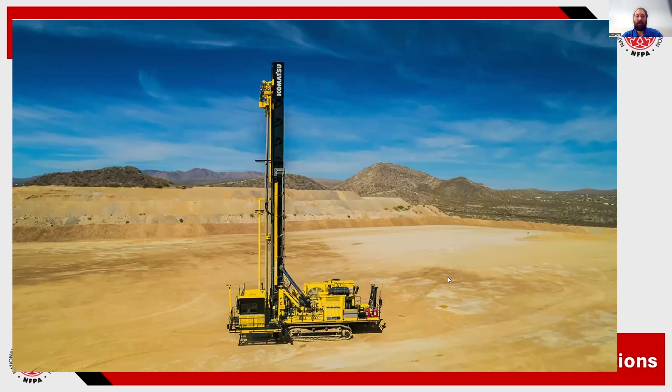In addition to the Ultra Class 320 XPC electric drill, we also offer several diesel-powered drill models. So pictured here is our ZR122, which is named for the 122,000 pounds of available drilling force. The tall structure you see sticking up into the air is called the mast on the drill. And on the mast is a hydraulically driven carriage on a rack and pinion drive for the vertical movement of drilling. The carriage also contains two hydraulic motors on a large gearbox transmission for rotation of the drill string. So together, this rotation and vertical movement are the motions used for drilling holes.

There are additional auxiliary components mounted on the mast that are used for adding and removing drill pipe and drill bits as these consumable components wear out over time. Every motion on our ZR machines is hydraulically powered, whereas on our 320 XPC drill, we have both electric drive and hydraulic controlled functions. Our discussion today will be primarily focused on our ZR line, although there is some overlap with our electric machine.

Today we'll be touching on many of the functions used when operating blast hole drills, but at the end of the day, their purpose is to drill out a series of holes in the ground called a pattern so that the blast crew can load the holes with explosives, set off the charge, fracture the rock, and ultimately load and process the material. These holes range in depth from about 50 feet all the way up to 280 feet deep.

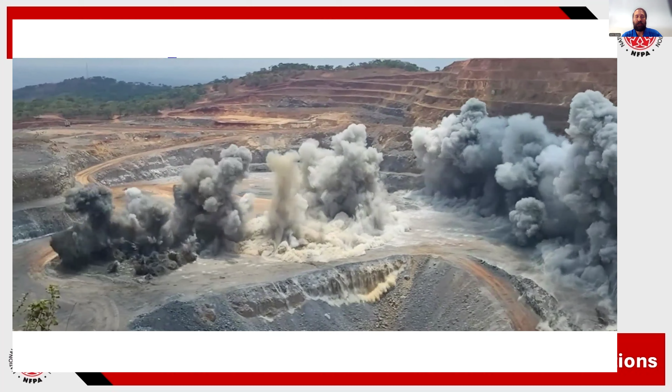So as drill engineers, we can't help but include a short blasting video to illustrate this part of the mining process. So you can see the blast going off in the video right now. Hopefully this will give you a good understanding of what a blast hole drill is and the type of environment it operates in.

So now I'm going to give a brief overview of some of the major components of the machine hydraulic system before Cameron goes into a little more depth on how we utilize the sensing technology to control various functions on the drill. I'm going to focus on our open loop or auxiliary circuit for today. This system on the drill controls all the functions that are not either drilling holes or propelling or tramming the machine from hole to hole.

So at the heart of our open loop circuit, we have a 210 cc variable displacement axial piston pump. From this pump, flow is directed out to multiple valve manifolds that control actuators, which are mostly hydraulic cylinders, and these actuators perform various functions on the drill. The major valve manifolds we have on the drill include mast control, drill bit and drill pipe handling control, and leveling jack control manifolds. On each of these manifolds, we include a load sense pressure transducer to read the load pressure at the valve work ports when that valve is active.

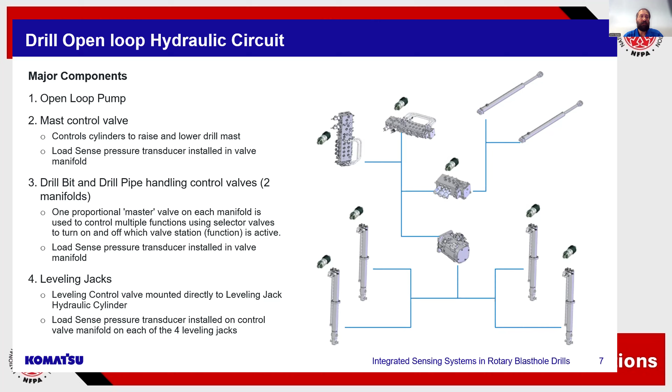So we have two manifolds on the drill that are used to control functions like bit changing, pipe changing and storage, and breaking pipe joints. These are our drill bit and drill pipe handling control valve manifolds. Each of these manifolds has a master proportional valve and then multiple selector valves. Each selector valve turns on and off functions that require proportional control but do not need to run concurrently.

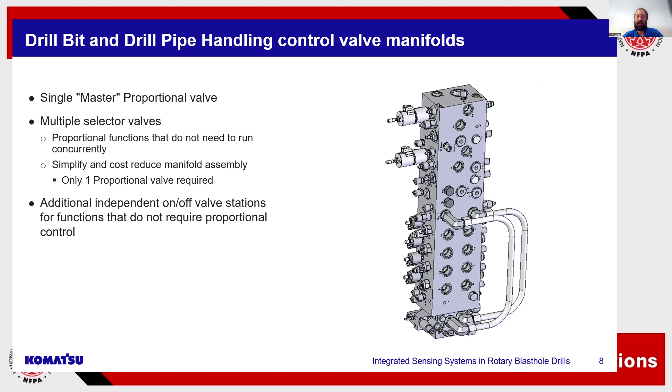This manifold design was chosen to simplify and cost reduce the manifold assembly, as only a single proportional valve is required, but we still maintain proportional control for several different functions. This manifold also includes a few additional independent on-off valve stations for functions that don't require proportional control.

The mast control manifold has a proportional valve that directly controls the mast raise and lower hydraulic cylinders. Most of the time when our drill is working, the mast stays in its vertical orientation, but we do offer angle drilling options which require the mast to be tilted at an angle when drilling the hole pattern, and also when the drill is being moved off a pattern or propelling a longer distance or perhaps up a steep grade in the mine, we do lower the mast down to the horizontal orientation.

The large hydraulic cylinders used to raise and lower the mast have integral counterbalance valves to prevent a runaway condition with the large overhung load of the mast when you're moving it up or down. A load sense pressure transducer is installed in the valve manifold and provides real-time feedback to our control system that's used to optimize the hydraulic pump setting and control when we're moving the mast.

Just like the last manifolds I showed you, this manifold does also include a few independent on-off valve stations as well for functions that don't require proportional control, such as our mast pins, which lock our mast in place prior to beginning drilling.

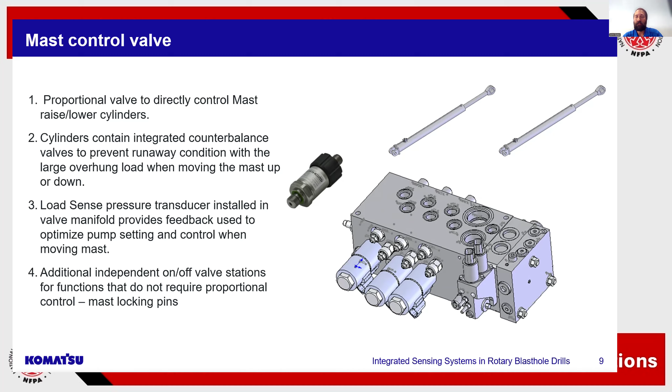On our open loop pump, we have an integral proportional relief built in that's used to set the pump pressure based on feedback from the load sense pressure transducers that we have installed on each valve manifold. So the load is sensed by those pressure transducers installed in the load sense ports of the control valves, and then the pump relief is set using that value plus a margin pressure to match pump output to system requirement.

This replaces a traditional load sense control where physical hoses would be routed from each valve manifold load sense ports and then back into the pump controller to set pump pressure. So we achieve the same result utilizing sensors, and we have the additional benefit of eliminating all those physical hoses and potential leak points around the machine.

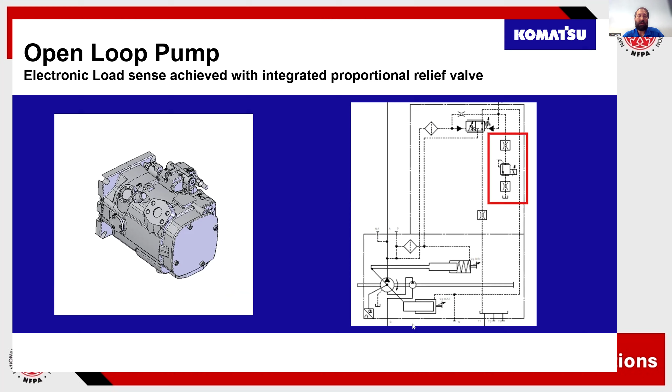The last valve I'm going to touch on today is our leveling control valve. So we have 4 of these on the drill. There's 1 for each leveling jack, which are on the 4 corners of the drill. The leveling control valve is mounted directly to each leveling jack's hydraulic cylinder, and the manifold also contains counterbalance valves for controlled lowering of the drill and also locking the jack cylinder position when the level condition is achieved and the valve is off.

A load sense pressure transducer is installed in the control valve manifold on each of these 4 leveling jacks. And similar to the mast valve, these sensors provide feedback used to optimize the pump setting and control when leveling the drill. Now, Cameron's going to go into a little more detail on that leveling process shortly and how that actually works.

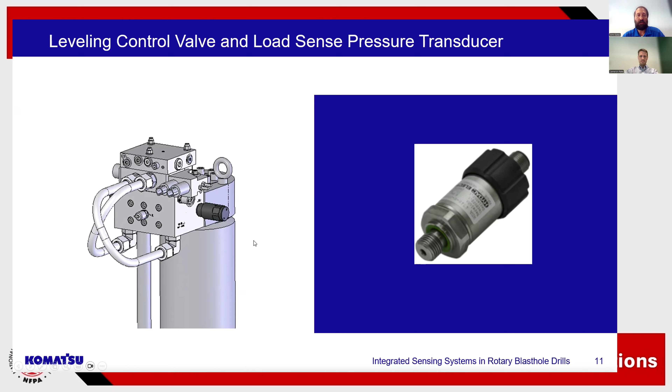So that's a brief overview of the physical hydraulic system. And now I'm going to turn things over to Cameron Raitt, our lead controls engineer for drills here at Komatsu, and he's going to get into a little bit of how we actually use those sensors to control the hydraulics.

Right, thank you, John. So I actually have a factory automation background. So those who have done controls and automation for factory machines, they know just how exciting that is. So when I started at Komatsu 13 years ago, I was actually instantly drawn to the drill products just because they're unlike any other piece of mobile equipment that's out there.

They're not just doing a repetitive motion over and over again. They're doing a series of actions through roughly 15 different subsystems with multiple variations of those actions. So actually drills were a very smooth transition for me from factory to mobile equipment.

To touch base on some of those subsystems, prior to drilling a hole, we must be level to ensure our accurate hole trajectory, which is kind of what John was touching on in the hydraulics of the leveling system just a minute ago. So automatic leveling is standard on blast hole drills now. So we asked ourselves, how could we create a system that stands out as faster, safer, more reliable?

So we started designing with the 4 independent proportional hydraulic jacks, which are the actuators of our system. And we selected a 2-axis CANopen inclinometer, which operates at a typical accuracy of plus or minus 0.1 degrees. So, typical hole, 50 feet, we can be within inches of our target location, 50 feet down. So the accuracy really plays in there. And this is, of course, assuming that we've done an accurate calibration.

This accuracy, along with the minimum sensor protection of IP67, which is a rating that we select for all our sensors on our drill, is what really drives our reliability. And there's also temperature ratings. -40 is our minimum as well for all sensors when we're selecting them.

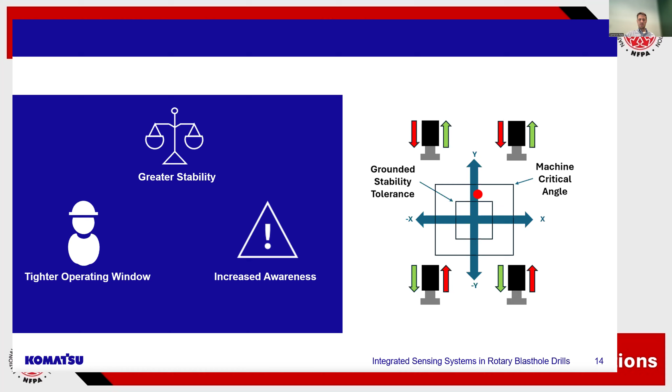I want to briefly touch on the next system, which is the mast raise lower. I know John touched on it a little bit earlier. So the mast itself is controlled with a pair of proportionally controlled hydraulic cylinders for raising and lowering, and then a pair of locking cylinders to lock the mast to the A-frame when it's raised. And then there's also a pair of locking and unlocking cylinders for angle struts. That's for optional angle drilling applications.

Our proportional valve takes in a command map based on the same CANopen inclinometer just mounted to our mast. And that allows us to do a soft landing on the mast rest in the case of lowering, or triggering our locking pins in the case of raising. So the operator selects the target angle, and then with the press of a button, the struts are unlocked and the mast moves into that target position. And then the struts are locked in at that target angle.

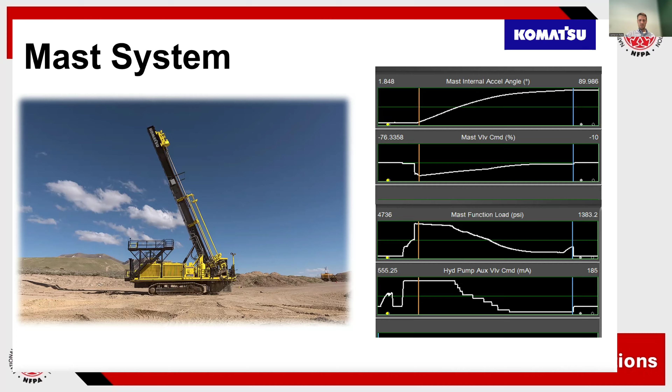Cameron, I'm sorry to interrupt. We have a question in the chat that I think this would be the right time to ask. Do you face issues with sensor performance due to vibrations that may be generated and transmitted during the drilling operation? Any sensor failure issues due to high frequency vibrations?

Yes, definitely. We've run into that in the past. That's another component of sensor selection that is very important. Not just the temperature rating, but also the shock and vibration ratings as well. And then the IP67 rating, which I touched on as well. So all these are a minimum requirement anytime that we do a sensor selection.

Actually, sometimes what we found is that the sensor itself can handle the shock and vibration during drilling, but it's actually the connector that faces issues quite a bit of the time. So that's where best routing practices come in, cable management, all that is essential for avoiding those issues, because the last thing you want is a sensor to take down the entire network. So those are all key points. So yeah, that's a great question.

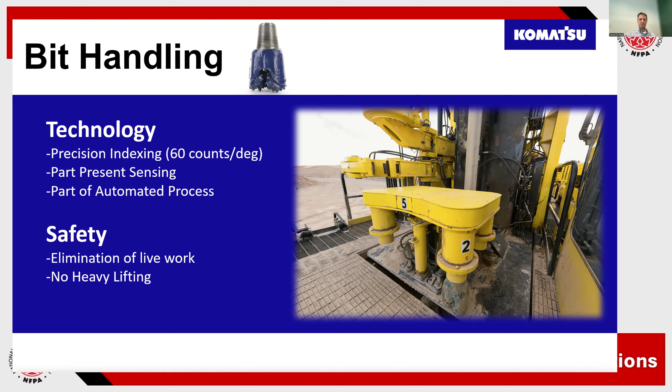As far as sensor accuracy, the encoder that we have selected for our bit handling has a very precise indexing count. There's roughly 60 counts per degree, which is about 1/100th of a degree accuracy. So we have more than enough accuracy to properly place that bit. We have part presence sensing to know which pots are available and which pots have a bit in them. We can also track, based on where that bit is placed, the number of feet drilled on that bit as well. So all this leads into, and I don't want to steal Shane's thunder too much, more of our automated process of bit handling.

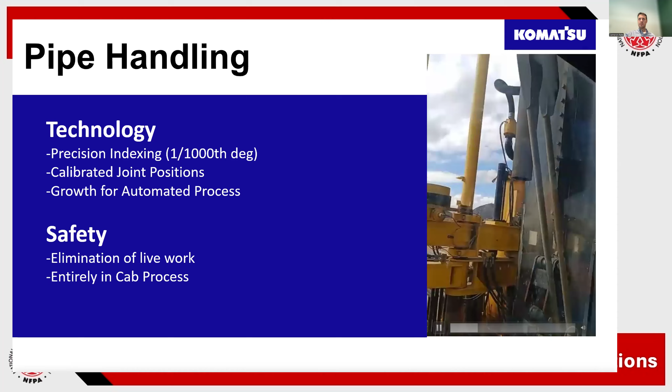Once again, this eliminates live work because this can be done entirely in the cab. The operator doesn't have to get out and eye up where things line up, and you can stay in the cab the whole time. And this is just a sped up sequence of what exactly is happening. There you can see the pipe carousel swung out of the way. So this would be the adding pipe sequence itself.

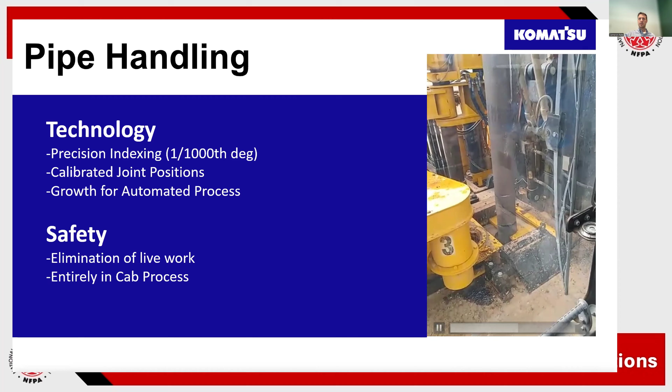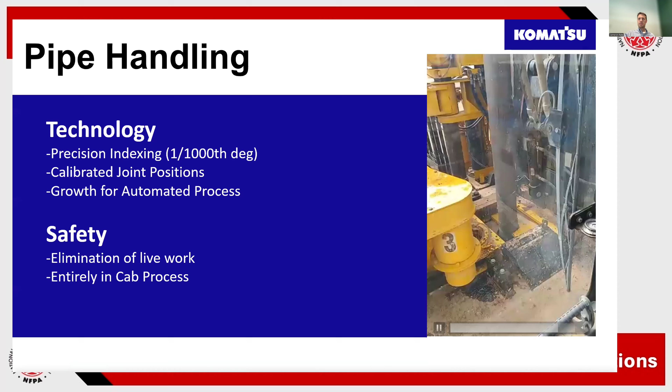So the existing pipe is actually held into place with that slide wrench I was describing, and the pipe moves down to that location and threads on. And then they could continue drilling to their targeted depth. And then the slide wrench moves out of the way.

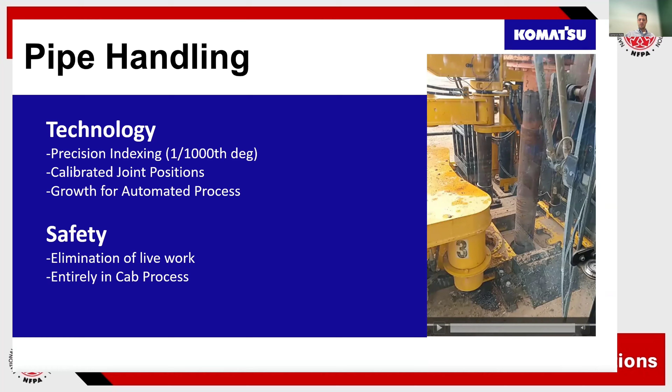So with all that, I think I covered the basics of the subsystems themselves. I want to let Shane talk a little bit more about the automation of the machine.

Thanks, Cameron. Like was previously mentioned, my name is Shane Swager. I've been with Komatsu about 10 years, working in various different technology groups over the years, and now fully into drill automation. Go to the next slide, please, Cameron.

So Cameron and John described the core hydraulic functions of the rotary blast hole drill. We can take that with their high level of sensors and automation of these subroutines and enhance with additional technologies to increase the level of automation and also to facilitate remote operation. So one of the core sensors that allows for that is high precision global navigation satellite system, HPGNSS.

You've probably heard more of GPS. That's one constellation that feeds into that global system. With that, we can now close the loop on the drill bit position. We can calculate where that drill bit is in global space to within a few centimeters, and then have a control system that autonomously navigates the drill to position that bit over where the targeted position is for that hole. Then when we're drilling the hole, we can actually automatically drill to the designed elevation of that hole as well. So what that allows us to do, in addition to the functions that John and Cameron previously described, is now we can automate the entire drilling sequence.

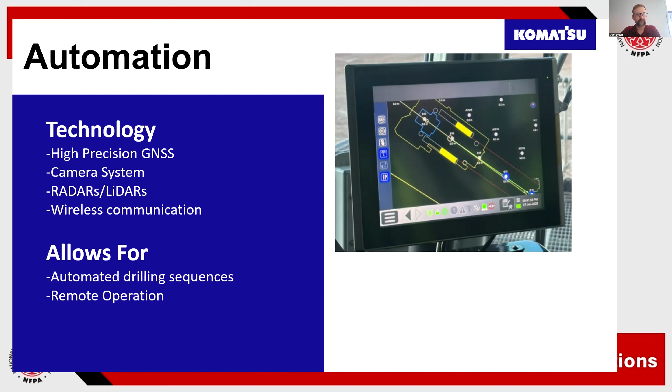So what does this mean for the customer? This means improved productivity on the drill, which reduces their time to complete a pattern. It can also reduce the amount of fuel that's used to execute a pattern. The primary efficiencies gained there are in the autonomous navigation aspect and also from the automated drilling and leveling aspect.

So as we start to get into the teleop portion, we can actually start to remove the operator from the machine. And so that helps reduce personnel exposure to things like dust, vibration, noise, etc.

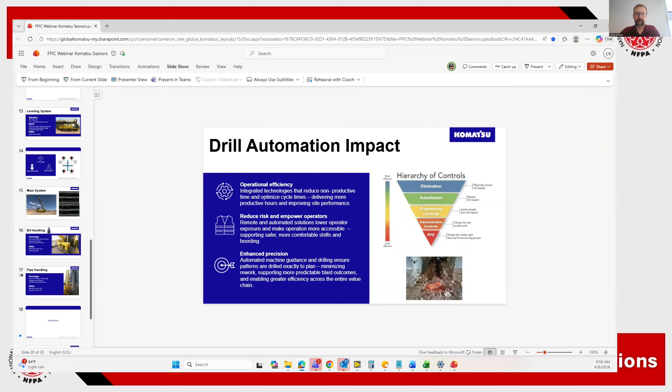We also gain some consistency. If the machine is drilling and navigating autonomously, you get a more consistent operation. And that consistency is also helpful for the data generated, which feeds back into the production process of the mine and then also into the planning process.

We also see better accuracy, meaning where the hole is started and where it completes from an XYZ perspective. That helps in a few ways: when holes are drilled more accurately, you get better blasting, which means the ore can be processed more efficiently, and it results in less cleanup time after the blast to prep the pad for loading. So that's less time, less fuel, which translates into dollars.

Some other benefits: it allows new operators to become effective sooner. Like a lot of industries, there are issues with attracting and training new operators as some of the workforce gets closer to retirement age.

This can also help with reduction in travel to remote sites. Some mine sites are very remote, high altitude, or in the middle of a desert, and they have to fly operators, maintenance, and other personnel in and out of site. If you're able to do a full remote teleoperation system, you don't have to fly as many people in and out, so you can save money and time that way as well.

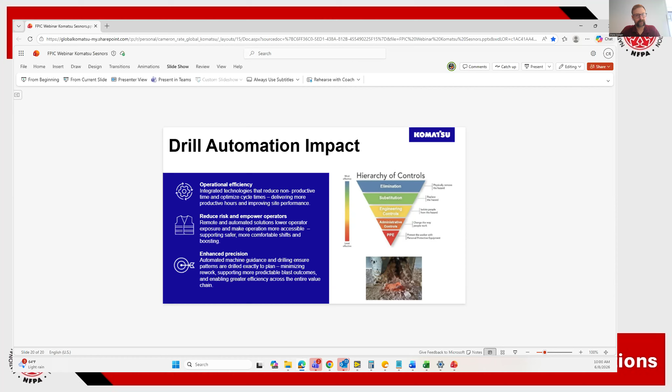Thank you, Shane, well done. Thanks for doing such a good job explaining the benefits of automation and how it really improves safety and the quality of life for operators.

I've got a question for Cameron on his presentation. He mentioned there was some chattering in the retract mode on the mast, and I'm really interested in stick slip. I'm wondering what exactly is causing this chattering when you're retracting the mast. Is it from the cylinder seal chattering, or what's going on with that?

Yes, that was from the leveling, specifically when we were skyjacked. I think part of it was at the time a counterbalance valve sizing issue. We swapped those out to a different counterbalance valve and it went away. But in the meantime, we did find that running it in a load sense configuration also helped. Hopefully that's a good enough answer.

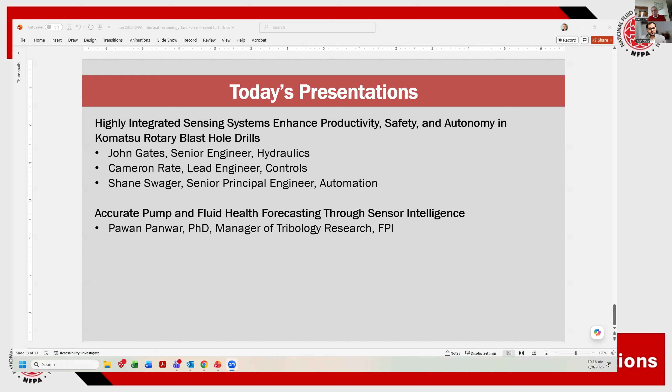Let me see if you can see my screen. Paul, can you see my screen? Cannot see it. Hello? Now I can. Okay, good.

Good morning, everyone. So currently at Fluid Power Institute of Milwaukee School of Engineering, we are working on various projects that focus on accurate pump and fluid health forecasting through sensor technology. So today I'll present some of the findings from those studies. So let's start with the use of sensors to monitor contamination and degradation of hydraulic fluids.

So as we know, hydraulic fluids degrade over time because of heat, catalyst, which could be metal because of the metal surfaces and the wear in the machines, and also the presence of oxygen. The degraded oil produces varnish, which consists of partially soluble oxidation products, and this deposit can accumulate inside the hydraulic system, which causes valves to stick and machines to fault, reduces heat exchanger efficiency, clogs filters, and therefore reduces their life,

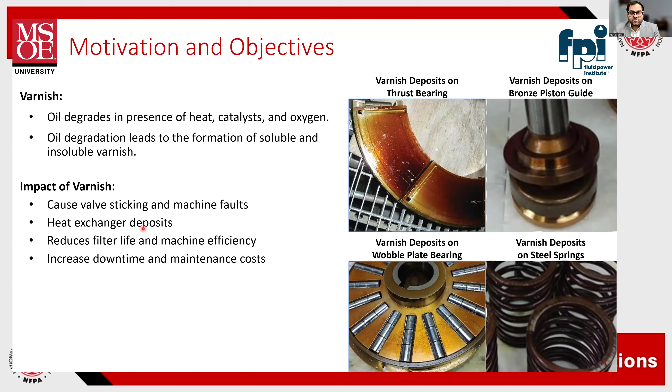increases maintenance cost and downtime. Therefore the objective of this study was to investigate varnish formation and its effect on the heat exchanger performance. In addition to this, we also wanted to see if we could use the condition monitoring sensors to detect varnish formation and also the precipitation of varnish.

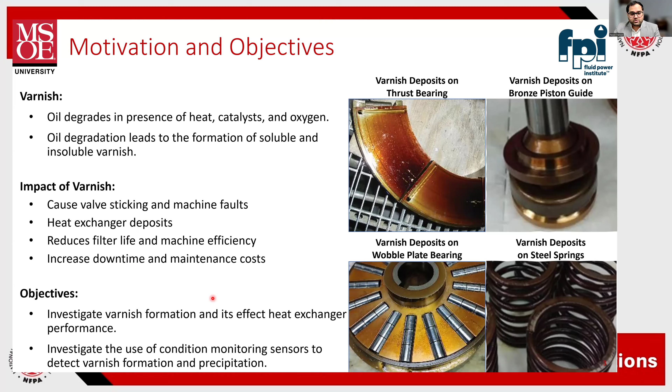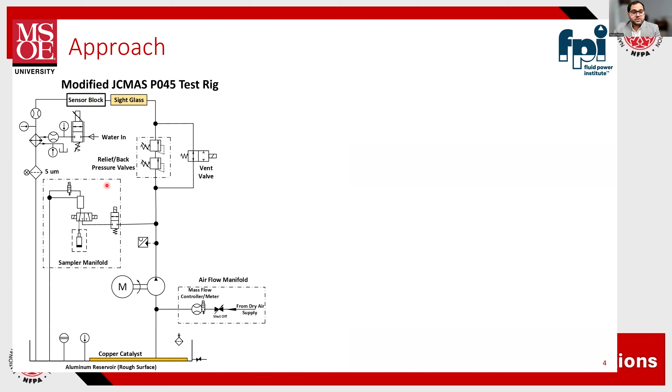So we started with building a custom test rig using the Japanese Construction Machine Association standard P045. In this test rig, if a fluid lasts for 500 hours, then it will last around 2000 hours in construction machines. So this test rig was run at an oil temperature of 80 degrees Celsius and a pressure of 5000 psi. We also injected compressed air at the inlet of the pump so that we could oxidize the oil.

We also used a copper catalyst. We placed a copper coil in the reservoir so that we could accelerate the degradation of the lubricant, and this test was performed for 1,000 hours. We used various sensors over the years. We used a particle monitor. We performed FTIR analysis both inline and using the benchtop. We also did infrared thermal imaging of the heat exchanger.

We had fluid property sensors that can measure a wide range of properties, not just viscosity, density, and dielectric constant. They can also measure other properties, and we also used a flow meter, which will be later used in the remaining useful life testing. So for this purpose, we performed four different tests using 3 different types of lubricant of varying chemistry and varying oxidation tendency. Okay.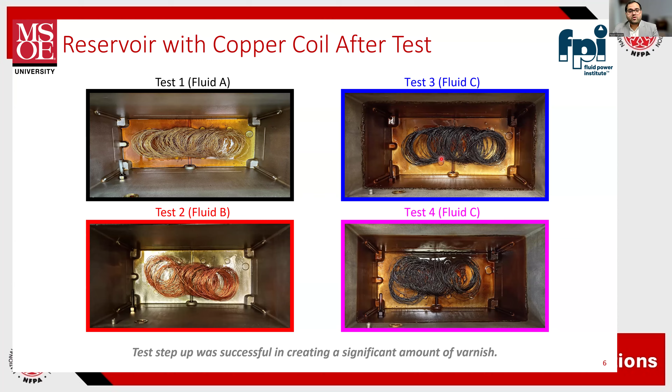When we look at test 3 with fluid C and test 4 with fluid C, we can see a lot of varnish deposition and the copper coil tarnished and turned red or black because the degraded lubricant deposited on the copper coil surface. Now, when we look at the heat exchanger plate, it is important to know we used a special type of heat exchanger for this study. We used a plate and frame type of heat exchanger so that we could assemble and disassemble it before and after the test to inspect the varnish deposition.

So we are using the concept that as soon as the hot oil with varnish comes in contact with the cold heat exchanger plate surfaces, the varnish will precipitate on the heat exchanger plates, so that at the end of the test we could see which oil produced more varnish and had more precipitation on the heat exchanger plate.

In addition to this, as I mentioned, we are also doing IR imaging of the front of the heat exchanger plate so that we could see how the heat exchanger performs as the varnish deposits on the plates. So shown here are the new plates before the test. We use 10 plates. As you can see, all 10 are very clean, and these are the 10 plates after test 1. It's almost the same as the new plates.

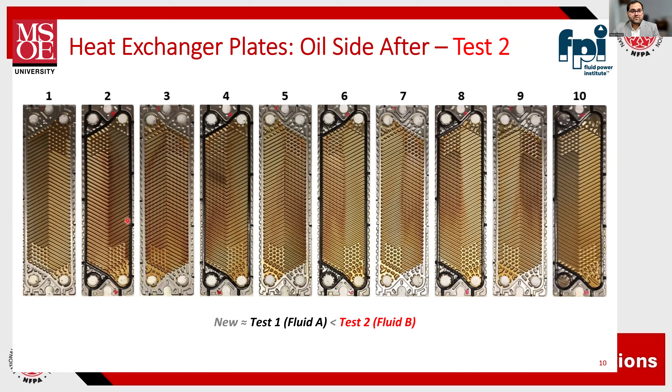After test 2, there is some varnish deposition. And when we go to test 3, we can see lots of varnish deposition, more in the beginning of the heat exchanger. In the heat exchanger, the flow starts from 1 to 10, and we can see a lot more varnish deposition on the beginning plates compared to towards the end of the plates.

When we look at test 4, we can see it has a lot more varnish compared to any other test. The reason is in all other tests we had 5 oil paths. In test 4 we had only 4 oil paths, and because of that lower surface area we see more varnish deposition on the plates.

Then when we look at the IR images of the heat exchanger plate, we can see something interesting. As we start the test, the oil warms up, and you can see the belly on the heat exchanger plates. This is showing the hot spot. This is where the oil enters, and the water enters from the top and travels to the bottom, whereas the oil goes from bottom to top.

What is interesting to see is that at 400 hours, the belly size starts to drop. What's happening is that because of the varnish deposition around 400-500 hours, the heat exchanger is not able to transfer the heat from the oil to the plates or to the water, and therefore it disappears after 400 and 500 hours. And this can also be validated when we look at the sight glass.

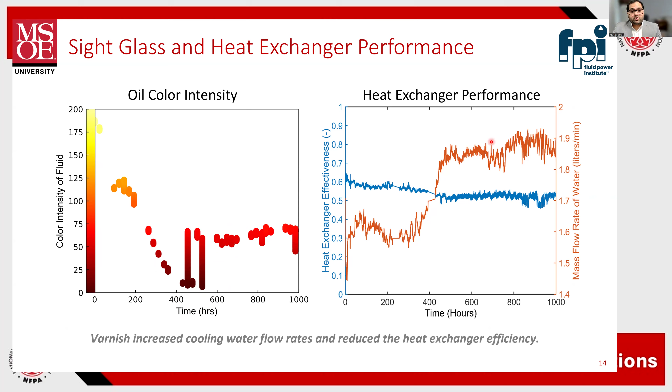We had a sight glass. We were recording video of the sight glass so that we can see how the oil color is changing as the test progresses. And as the test progresses, the oil gets darker and darker. But something interesting happens between 400 and 600 hours: the oil color intensity fluctuates, which is the point where the oil deposits precipitate on the heat exchanger plate, and therefore we see an increase in the water flow requirement to maintain a constant oil temperature of 80 degrees Celsius.

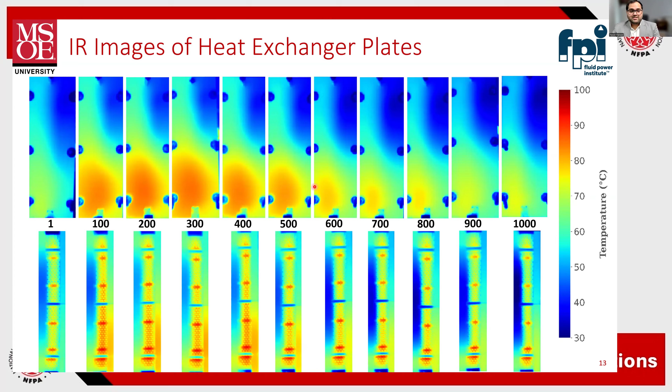The same thing we can see around 400-600 hours: the belly size decreases between 400 and 600 hours. This is also proved when we conducted chemical analysis on samples collected every 100 hours. We did benchtop testing, and we found that the ZDDP, the zinc and phosphorus levels, drop around 400 and 600 hours. And when we look at the copper content in the lubricant, we can see it maxed out between 400 and 600 hours, because around that time the copper coil is fully covered with varnish.

So this is interesting. Most of the additives deplete around 400 and 600 hours, and they deposit on the heat exchanger field. Therefore, the heat exchanger performance drops, and it requires more water to maintain a constant oil temperature.

We used a fluid property sensor from TE Connectivity. We used this in all 4 tests. In the first 3 tests, it was installed before the heat exchanger. In test 4, it was installed after the heat exchanger. We wanted to see if we can detect varnish earlier if we install the sensor in the colder line compared to the hotter line. This is showing the mean temperature at which those sensors were installed. The first 3 are installed around the same location, whereas the 4th one is installed after the heat exchanger.

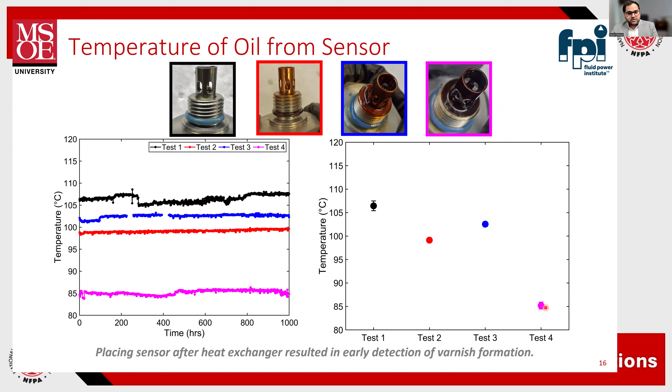By looking at the picture, we can see this is test 1. There is no varnish deposition. There is almost negligible varnish deposition in test 2, a lot more in test 3, and especially in test 4. We have a lot more varnish deposition because it was installed in a colder line, and therefore it also helped in early detection.

This sensor provides 5 different fluid properties, and we found that density and dielectric constant are the key parameters in detecting the onset of varnish formation. As soon as the fluid starts to degrade at a higher rate, we can see that at those points the density and dielectric constant start to change at a higher rate.

Recently, we installed a spectrolytic sensor system on our test rig, and this system provides ISO codes to monitor particles. In addition, it also provides acid number, water content, and kinematic viscosity at a chosen temperature. What separates this sensor system is that it can perform FTIR analysis in real time and tell us how much oxidation we have compared to a fresh fluid.

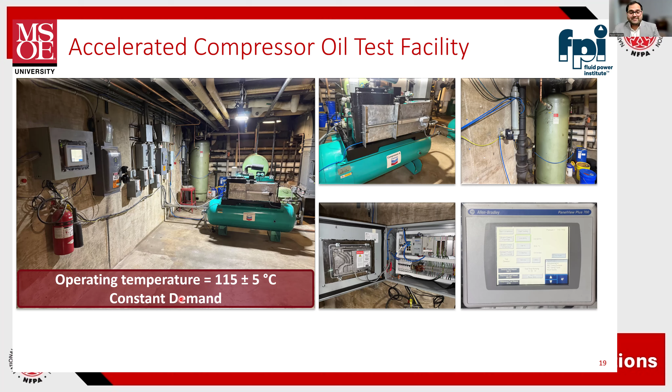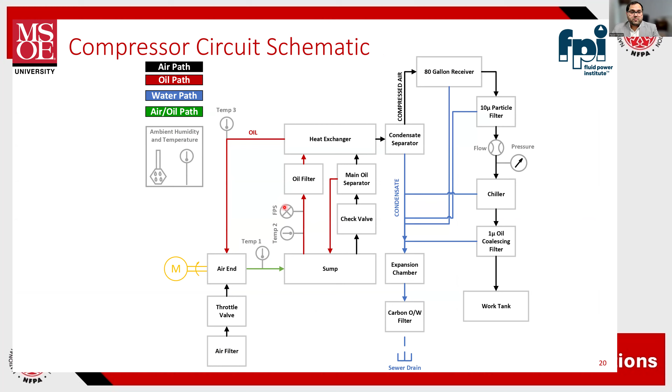So in this compressor test rig, we install the fluid property sensor that we found working really well. So this is just a circuit schematic of the compressor. We fully instrumented this so that we can evaluate how the fluid is doing and compare two tests side by side. So we had a fluid property sensor which worked really well in our accelerated oil aging test for hydraulic fluid, so we wanted to see how it does in the compressor testing.

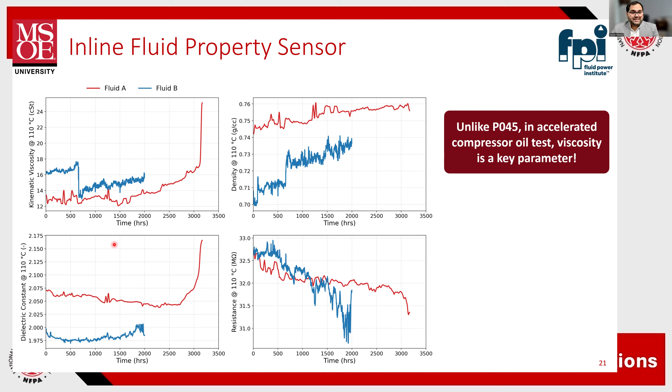And what we found is that in the P045, the viscosity did not increase, but here in the compressor test, the viscosity was a key parameter. So this is showing the operating hours and the kinematic viscosity, and we have the density, dielectric constant, and resistance of the fluid. And what we see, in addition to the density and dielectric constant, as the oil ages, we also see a drastic increase in the viscosity.

What we found is that even though there was no varnish deposition in the compressor accelerated aging test, it is because of the different lubricant chemistry, and also there is a different degradation mechanism compared to the P045. Therefore, whatever fluid property changes occur in the compressor test, it was purely because of the chemical changes in the test.

So just to summarize, we built a test stand to study the effect of the oil condition sensor in detecting the onset of varnish formation. And the test rig was able to consistently build the varnish, and therefore we were able to evaluate the effect of the sensor. So what we found is that the sensor properties were affected by the varnish formation and also the deposition on the sensor.

The key parameters were the viscosity, density, and dielectric constant for detecting the onset of varnish formation. So this suggests that we could use this fluid property sensor to accurately forecast the end of the life of the fluid.

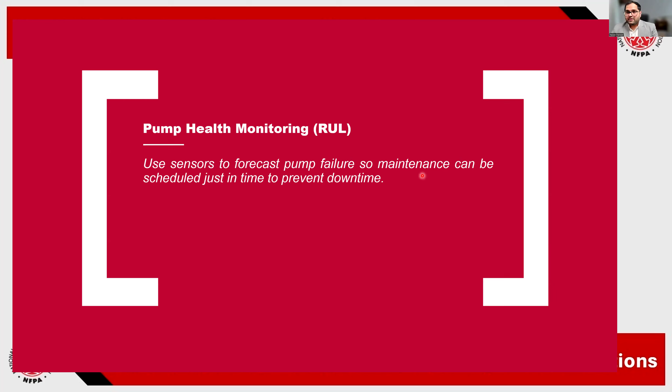So something interesting happened during this accelerated oil aging test, and that led to this second project where we are using sensors to forecast pump failure, so we can perform the maintenance on time to prevent costly downtime. So what we found is that after 4,000 plus hours in our accelerated oil aging test, the pump, which was a bent axis pump, the flow rate dropped by 50%. So we almost destroyed that pump within 4,000 hours.

So we wanted to see what actually caused the pump to fail within just 4,000 hours. So we took apart the pump, and what we found is that there were abrasive wears on the valve plate. We found cavitation damages on the cylinder ports, and also inside the ports as well. We also found sliding wears and pittings on the pistons.

So this catastrophic failure caused us a costly downtime, and this kind of damage also causes collateral damage in the hydraulic machines, because the lubricating gaps are very small, and even a small amount of wear particles can destroy other components. So what is the solution? The solution is to predict the remaining useful life of the pump so that we can enable just-in-time maintenance.

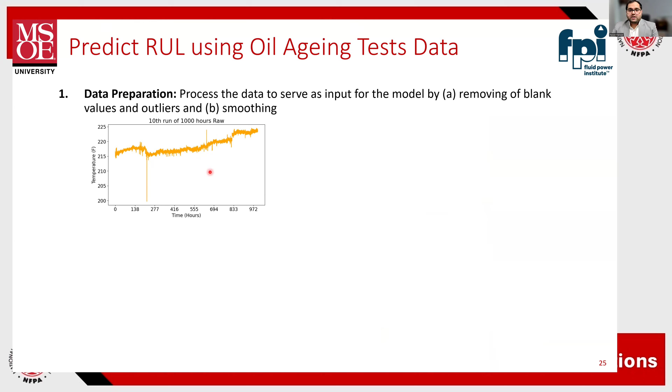So we first started with the data we had in hand from the accelerated oil aging test. So we started with oil temperature at the pump outlet. We first removed the outlier noise from the data, and then we systematically generated more pump failure data. We had only data from a single pump failure, and you cannot develop a machine learning or deep learning model using just a single set of data. So we needed more data.

So what we did, we used machine learning to generate the synthetic data of 100 different pump failures. And then we developed deep learning models using the convolutional neural network and long short-term memory. So what was the interesting thing when we compared those two models?

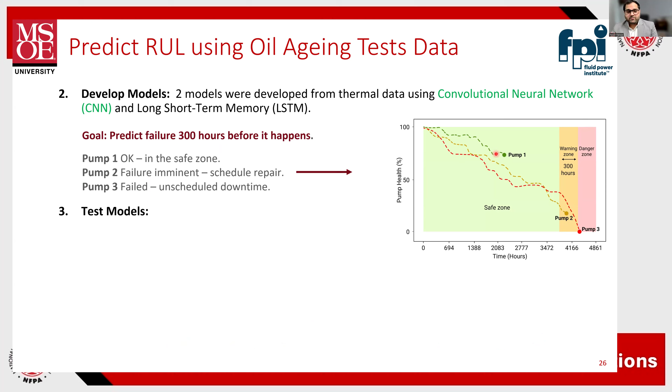So when we developed the model, we used 70% synthetic data to train the model, 10% data to optimize the hyperparameters of the neural network and LSTM model, and the rest of the 20% synthetic data plus the experimental data of the real pump were used to validate the model.

And what we found is that the convolutional neural network model achieved 91.9% accuracy, significantly outperforming the LSTM model. The convolutional neural network results show that we can predict the pump failure approximately 300 hours before it occurs.

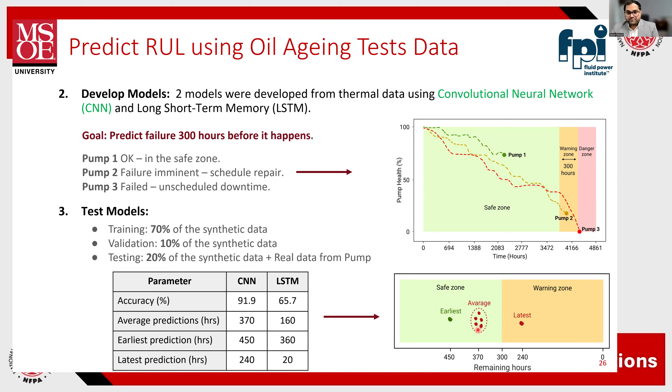So it means this model can allow around 300 hours for us to perform the maintenance before it fails. Okay. What is the problem with this kind of model, using the temperature to predict the remaining useful life? The problem is that the temperature response is slow because of the thermal mass. Okay, therefore it detects damages only after it occurs.

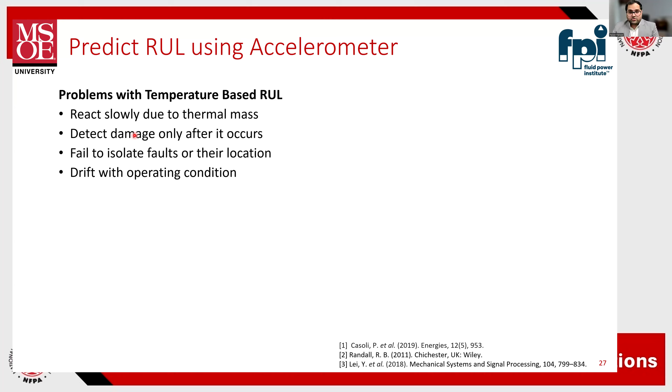Also, one thing is that when you use the temperature, it cannot isolate the type of fault or where the fault is in the machine, and also the temperature drifts with operating conditions. So therefore, we had to use something else. So we did research and we saw that accelerometers have been used for decades to detect faults in the machine. Okay, just to detect the fault.

In recent years, in the last 10-15 years, they've been used to predict the remaining useful life, but mostly for bearings, gearboxes, and turbomachinery. Especially the hydraulic pumps and motors are understudied, because of two reasons. Because the wear is distributed between multiple sliding surfaces, and the hydraulic pumps operate at a wide range of operating conditions. Therefore, when a system operates at a wide range of operating conditions, the vibration signature also varies with those operating conditions.

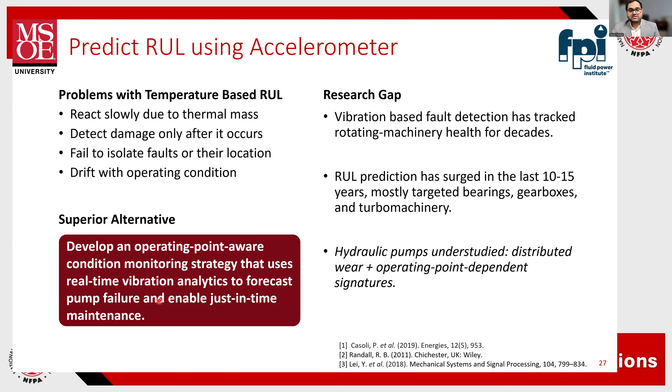So when looking at the temperature sensor and the gap, we decided that we need to develop an operating-point-aware condition monitoring strategy that uses real-time vibrational analytics to forecast the pump failure and enable just-in-time maintenance so that we can avoid the costly downtime. So what we did, we modified our accelerated oil aging test so that we can perform an accelerated wear test.

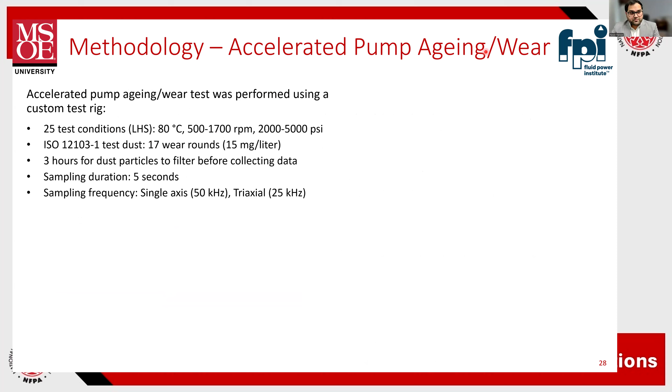So this is our updated modified test rig, where we now have automated pressure control, and we installed two accelerometers, one triaxial accelerometer and one single-axis accelerometer. Okay, and then we performed the test at 25 different test conditions at 80 degrees Celsius. The speed varied from 500 to 1700 RPM, whereas the pressure varied from 2000 to 5000 psi. So this is the operating envelope in which we conducted the test.

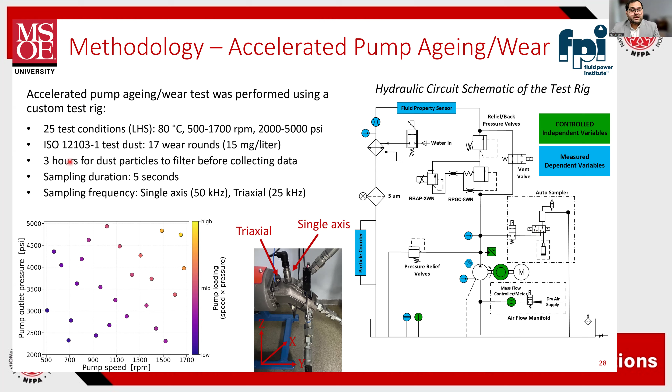What we did to accelerate the pump wear, we put in ISO dust. So we put ISO dust 17 different times, around 15 milligrams per liter, a very small amount of dust, not even a pinch. And then we allowed 3 hours for the dust to filter through the oil filter, and we collected 5-second data using the accelerometer. Okay, we used a very high sampling rate for the accelerometer.

And then we also had a particle counter. So when we look at the particle counter data over the complete destruction of the pump, we can see each dust injection produces a sharp ISO cleanliness spike. The filter immediately cleans the dust from the oil, until we put in the next round of dust. Okay, so this gives us 17 clean and repeatable behavior steps, going from R0 to R17, where R0 is the new pump.

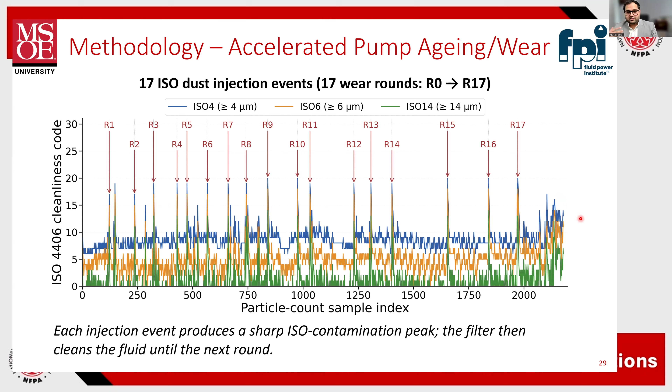An interesting thing to note here is after the 17th round, even though we did not add any more dust, the ISO 4406 code continuously increased with time, which suggests that the pump is now towards its end of life and it's now producing wear particles. So after the 17th round of dust addition, completely destroying the pump and reducing the volumetric efficiency of the pump by 50%, we took apart the pump so that we could inspect it.

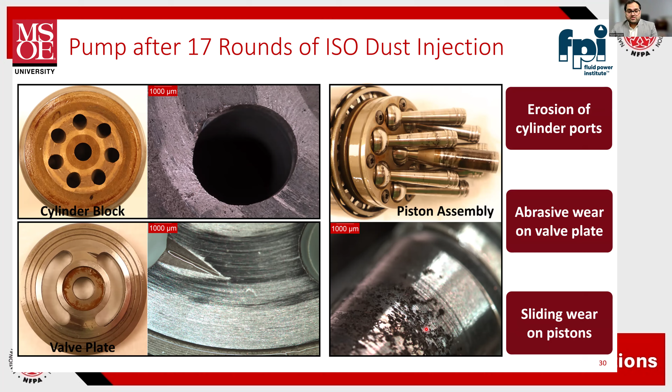And what we found, we had erosion of the cylinder ports. Okay, as you can see here, we found abrasive wear on the valve plates, and sliding wear and pitting on the cylinders or on the pistons of the pump. So we had in total around 900 raw data files with 5 seconds of vibration signal in each of them.

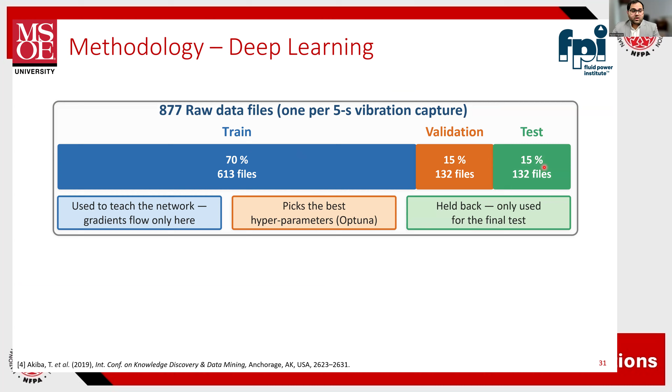Okay, so what we did, we split the data. We used 70% of this data to train the machine learning model or deep learning model. And then we used another 15% to optimize the hyperparameters, and the remaining 15% to test the model. So as an input to the model, we just provided the raw vibration signal without doing anything with it.

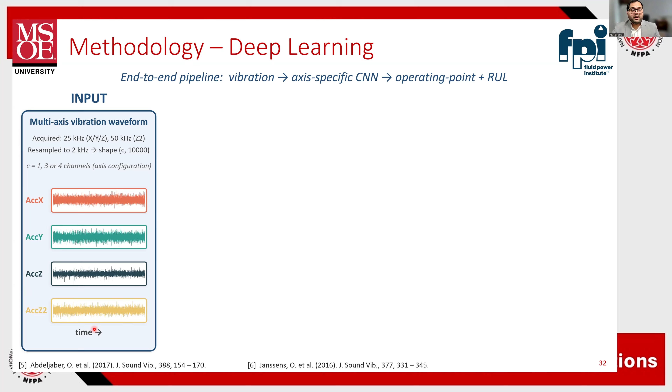Okay, so usually there are two types of models you can find. Usually you could provide the raw input directly from the sensor, or you calculate engineering features such as the mean of the vibration signal, standard deviation, those kinds of things, and you feed those to the model. But here we just provided the raw vibration signal to the convolutional neural network and trained it to predict a few things: the pump shaft speed, the pump outlet pressure, the volumetric flow rate, the volumetric efficiency, and the remaining useful life.

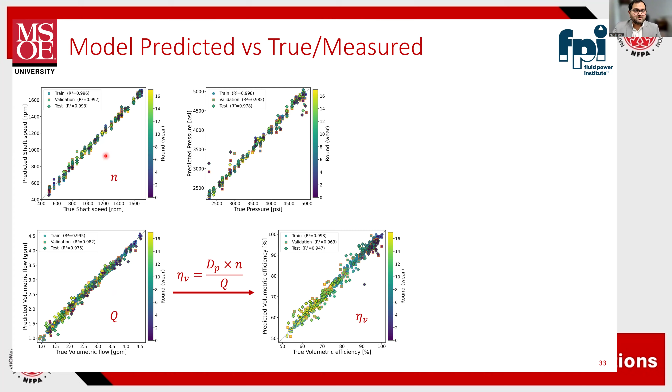So then we were able to predict the speed and the flow rate. Now we can calculate the efficiency using the displacement of the pump. So we calculated the volumetric efficiency, and then converted the volumetric efficiency to remaining useful life. And we can see for the remaining useful life, we have an R-square value of 96%. Okay.

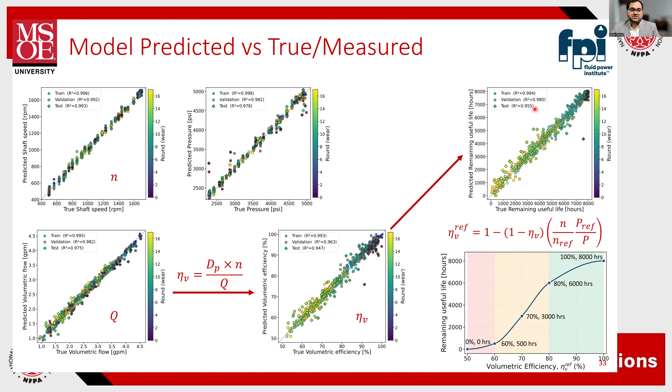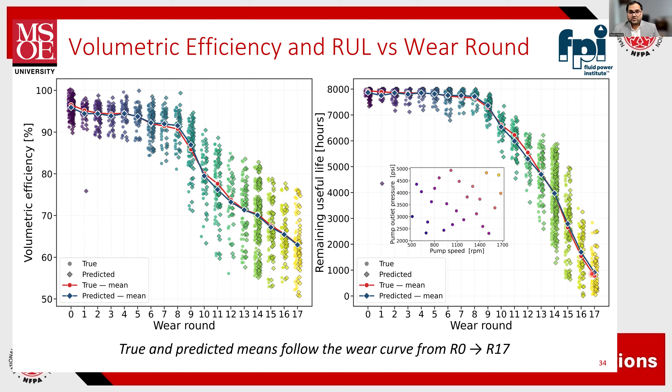So here we look at the remaining useful life. Again, we can see the true, which is measured, versus the predicted, and we can see the model works really well. And when we look at the mean of the true and predicted, both are closely following each other, which suggests the model works really well. As a function of operating condition, we are able to predict both volumetric efficiency and the remaining useful life. So we use one sensor to predict 5 different parameters.

So we wanted to see, since we use a triaxial accelerometer, can we just work with a single axis or do we need a triaxial? When we look at the R square value across all 5 predicted parameters for x-axis, y-axis, and z-axis accelerometer data from a single axis accelerometer, we can see that the triaxial outperforms all the single axis predictions, which suggests that we need a triaxial accelerometer in order to accurately predict both kinematic targets and the wear related targets. Okay.

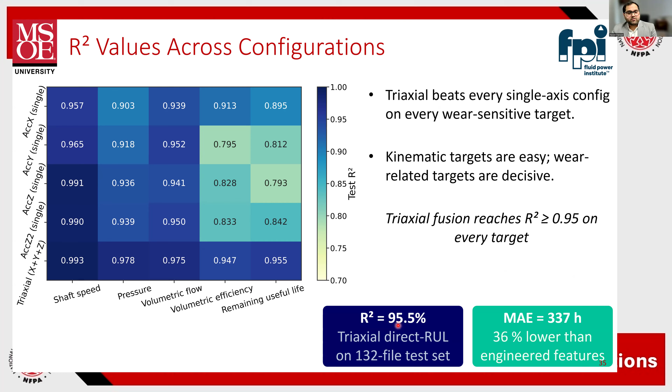And for triaxial, we had R square value for all these parameters above 95%. Okay. So we wanted to see which axis is more relevant in predicting the following parameters. And we found that the x-axis vibration is a dominant parameter when it comes to the wear related targets, which are the volumetric efficiency and remaining useful life. When we look at the speed, pressure, and the flow rate, we can see the z-axis vibration signals are dominant.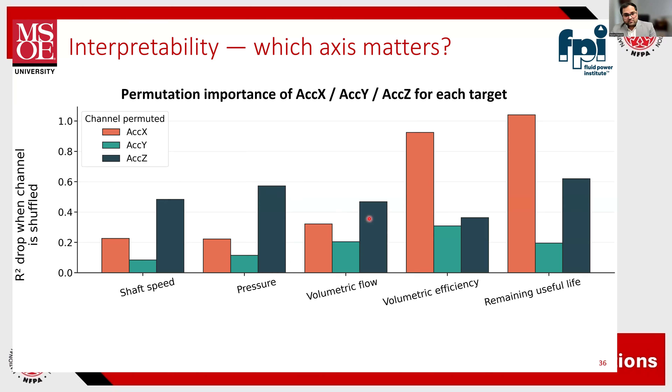So just to summarize, we predicted speed, pressure, flow, efficiency, and remaining useful life at R square value above 95%, with just 2 kilohertz raw data, and this is just a 5 second vibration signal. We did not use any engineered features. We were accurately able to disentangle wear from the operating condition, as this test was not performed at a single operating condition. It was performed at a wide range of operating conditions, and still we were able to disentangle the wear from the operating condition.

Single axis accelerometer had significantly lower accuracy compared to triaxial, so we do need a triaxial, and the z-axis vibration dominated the kinematic targets, whereas the x-axis vibration dominated the wear-related targets. Okay, so the conclusion is that we could use the accelerometer to accurately predict the remaining useful life as a function of operating condition, which can help us to forecast pump failure and also enable just-in-time maintenance.

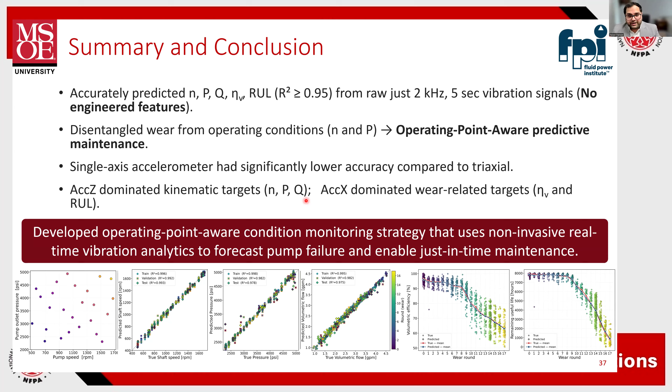Going forward, we will also introduce different types of failures so that we could see if this model can predict different types of failures and also different failure mechanisms.

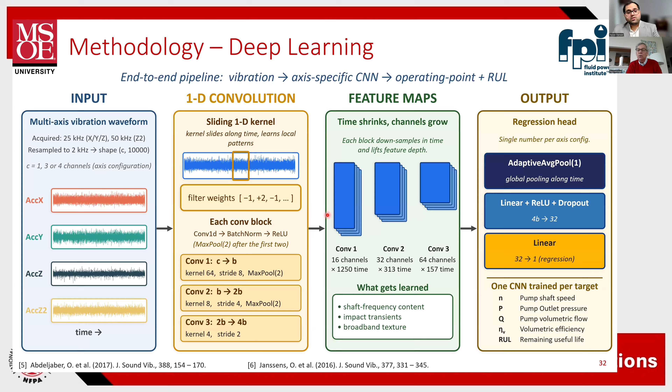We've got a few questions for you, Pawan. One is about pressure control: what is the typical pressure drop in the heat exchanger? I think around 15 to 20 psi, not a lot.

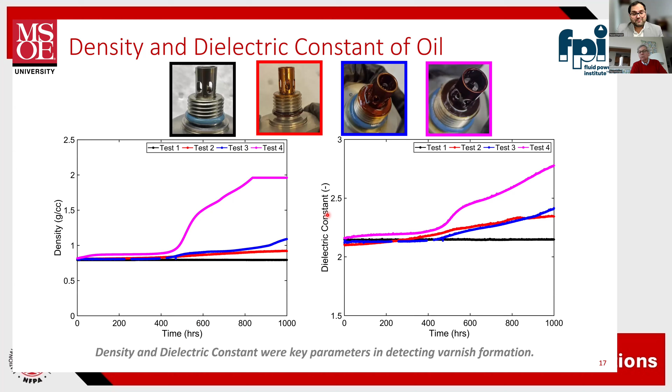Maximum maybe 50 psi. There's a question about what mitigation measures are available to prevent scale formation on the heat exchangers. Scale usually refers to mineral formation from water, but we can also speak to deposits from varnish. I showed the oil side in the presentation, and on the water side we saw scale deposits. We saw a lot more scale deposition when there was more varnish formation—especially in test 4, where we had a large amount of scale deposition. So using better oil may ensure the heat exchanger is not overperforming or underperforming.

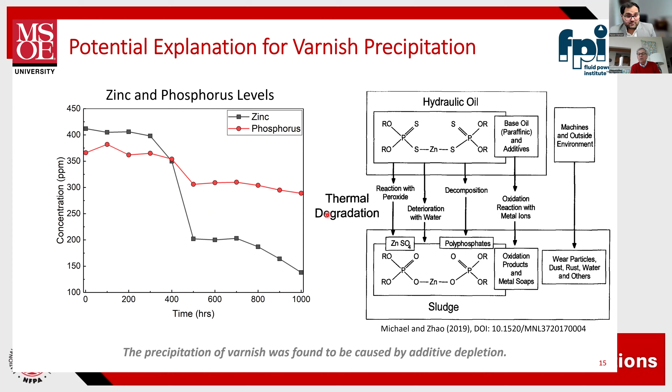There's another question about the differences between synthetic, biodegradable, and mineral oils in terms of varnish forming tendency. In your study, you've shown results for mineral oil-based hydraulic fluids, is that right, Pawan? Yes, we did not evaluate any biodegradable or ester-based fluid yet. It's mostly mineral based fluid, and we don't investigate the chemistry of the fluid—we just get the fluid and perform the tests.

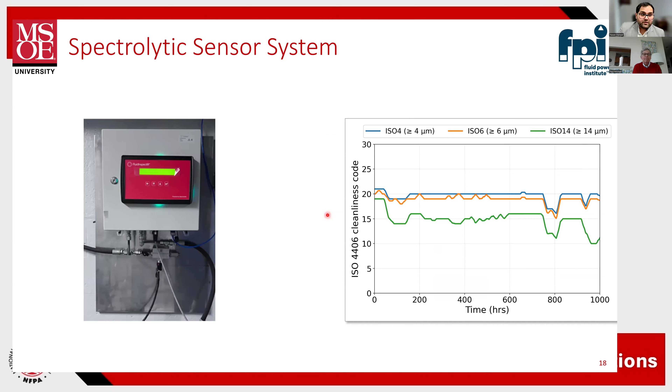Can the spectrolytic system detect early varnish? Can you comment on its performance? When we compared the benchtop FTIR data with the spectrolytic oxidation prediction, they were in line—same trend and almost the same oxidation number. So this can help detect the onset of varnish formation. But we haven't had any fluid with a lot of varnish formation tested with this sensor system yet, so we'll have a better answer once we have a fluid that degrades more, because this fluid did not wear at all—it was very similar to test 1 or 2.

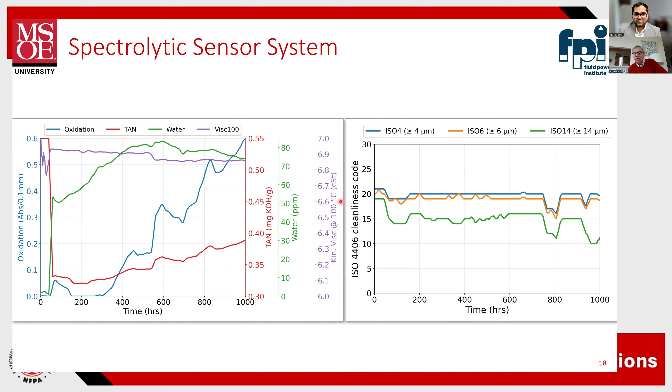Here's another question: is pump life degradation as repeatable as the study assumes? Can the trained model be tested on a new pump sample without dust addition and predict remaining useful life accurately? Yes, that's the plan. We've purchased a few more pumps—we plan to try three more. In one, we'll wear the pump purely using cavitation; in another, we'll use both cavitation plus dust addition; and in the last pump, we won't artificially destroy it at all, to see how our model works in real time without artificially destroying the pump.

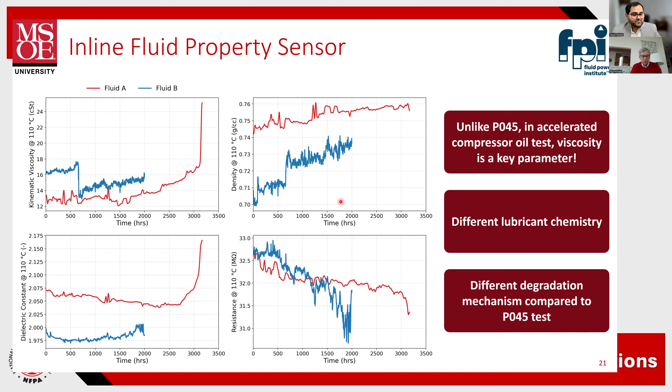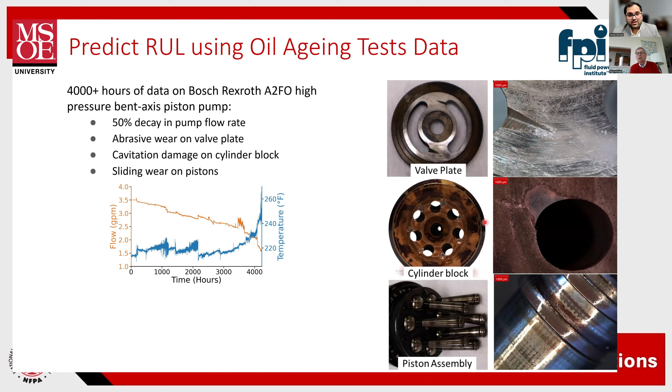Another question: did you use CFD simulations such as cavitation analysis instead of experimental testing to predict pump failure? No, we have not done any CFD analysis. We wanted to for the valve plate, but we haven't done any CFD.